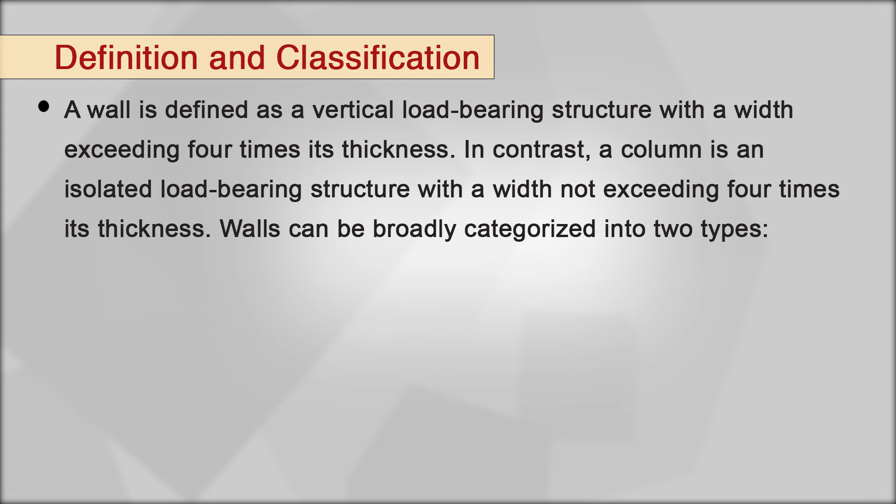A wall is defined as a vertical load bearing structure with a width exceeding 4 times its thickness, in contrast to a column, an isolated load bearing structure with a width not exceeding 4 times its thickness. So the walls can be broadly classified into two types.

Number 1 is load bearing wall, number 2 the non load bearing wall. Under load bearing walls, these are constructed to support the additional loads coming from the roof and other elements along with their own weight.

In contrast, the non load bearing walls support only their own weight and typically function as partition walls. In framed structures, the external non load bearing walls are often referred to as panel walls. These categories can be further subdivided into external or enclosing walls and internal or partition walls.

The load bearing walls. The load bearing walls are integral structural components which are designed to support the weight of a building, including the floors and roofs, in addition to their own weight. These walls transfer the load to the foundation, ensuring the stability and integrity of the structure.

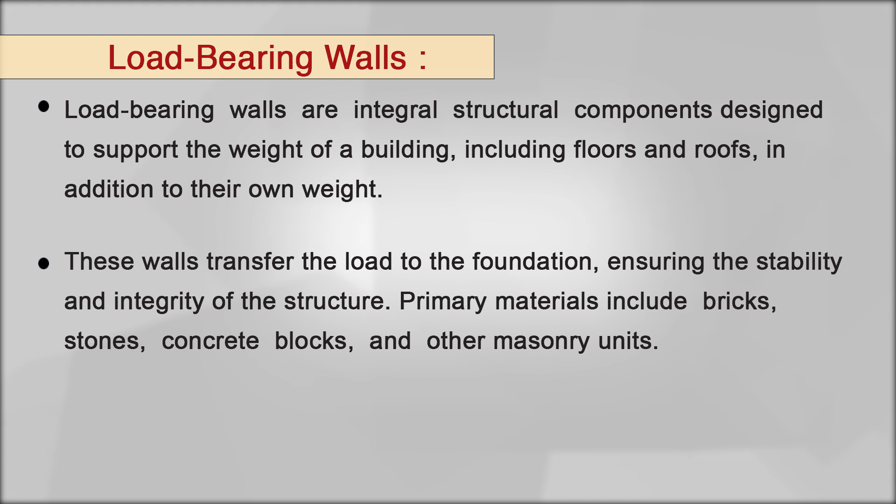Primary materials include bricks, stones, concrete blocks and other masonry units. The types of load bearing walls: number 1, solid masonry wall, cavity walls, faced walls and veneered walls.

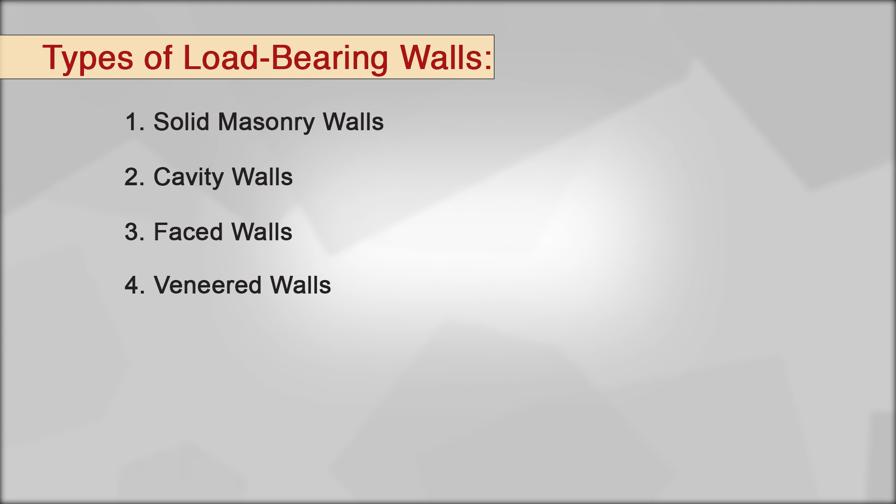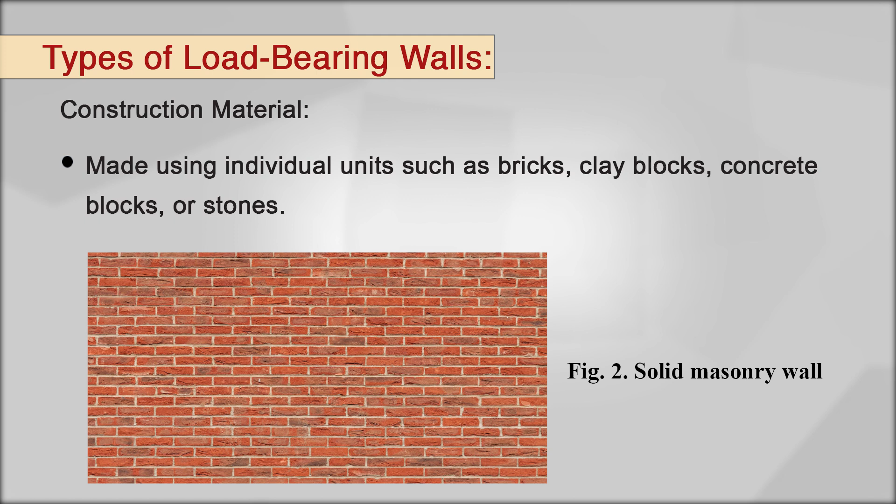The types of load bearing walls. Number 1, the solid masonry wall. It is constructed using individual units such as bricks, clay blocks, concrete blocks or stones that are typically laid in horizontal courses with mortar. The construction materials: it is made using individual units such as bricks, clay blocks, concrete blocks or stone. Their assembly: these units are typically laid in horizontal courses.

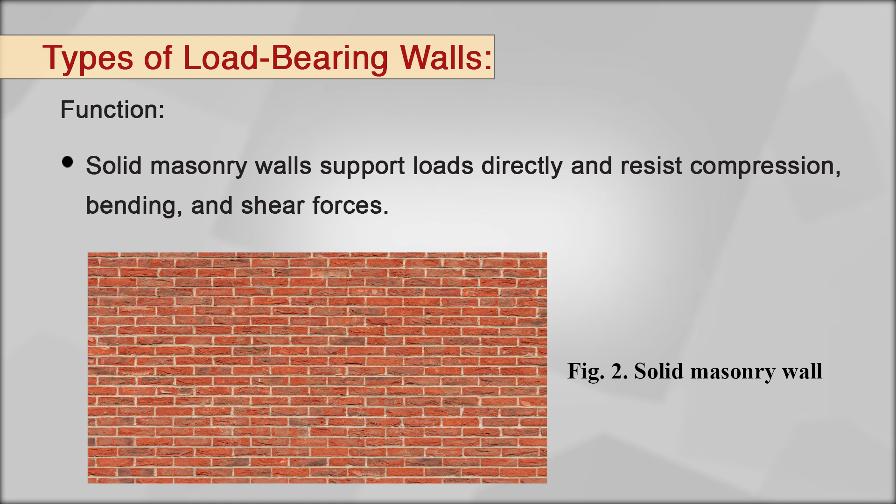Next is the bonding. These units are held together using mortar, which binds them and provides structural stability. Next is the function. The solid masonry walls support loads directly and resist compression, bending and shear forces.

Second type is the cavity walls. These cavity walls comprise two leaves separated by a cavity and are tied together with metal ties or bonding units. They are often filled with some insulation and waterproofing material.

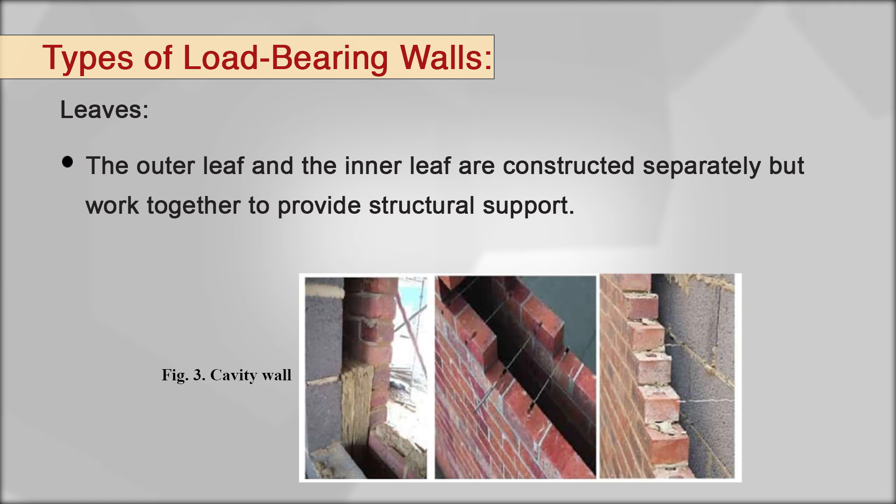The structure of the cavity wall: they are composed of two separate layers, also called leaves of masonry, with a gap or cavity in between them. The leaves are the outer leaf and inner leaf. These are constructed separately but work together to provide structural support.

Next is the bonding. To bond, metal ties or bonding units are used to connect the two leaves, ensuring structural integrity. Next is the insulation. The cavity in between is often filled with insulating materials in order to enhance the thermal performance and also waterproofing elements.

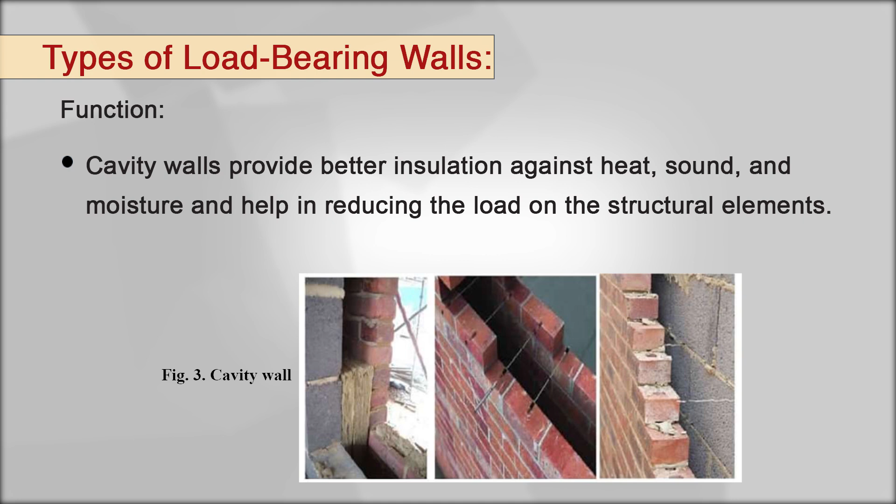The functions of the cavity wall: they provide better insulation against heat, sound and moisture, and also help in reducing the load on the structural elements.

The faced walls feature different materials for facing and backing. It is bonded to act together under load. So far as construction is concerned, it features different materials for facing and backing.

For facing, the exterior layer is typically made of a decorative or protective material like stone, brick or tiles. The backing, which is the internal layer, is usually constructed with materials that provide structural support. Next, bonding: the facing and backing are bonded together to work in union under load.

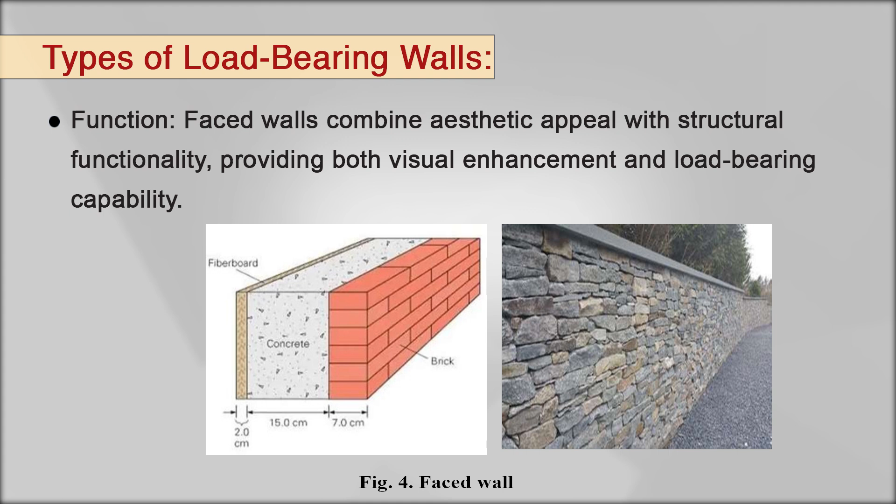Functions: the faced wall combines aesthetic appeal with structural functionality, providing both visual enhancement as well as load bearing capability. The next type is the veneered walls.

Veneered walls have a facing attached to the backing without a common bond to act together under the load. As far as construction is concerned, the facing material is attached to the backing without a common bond that unifies them. The external veneer is often made of high quality or decorative materials like marble, granite or bricks. Backing materials are typically different, mostly less decorative, maybe concrete or masonry.

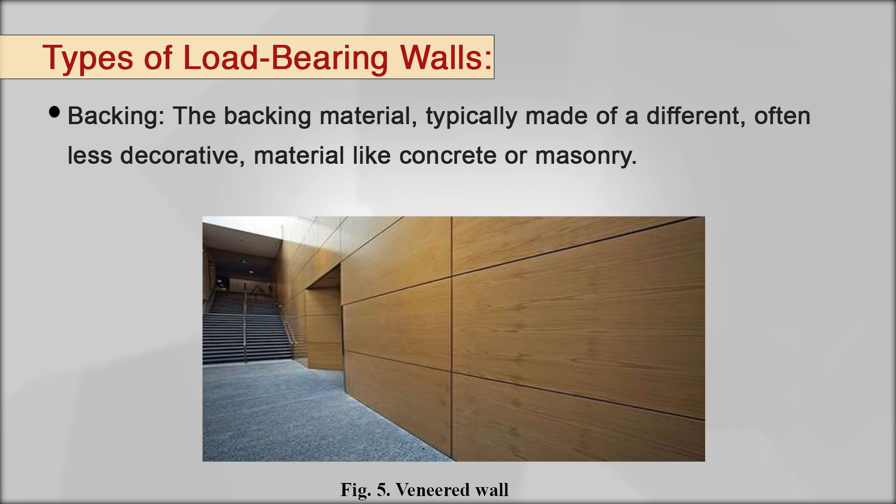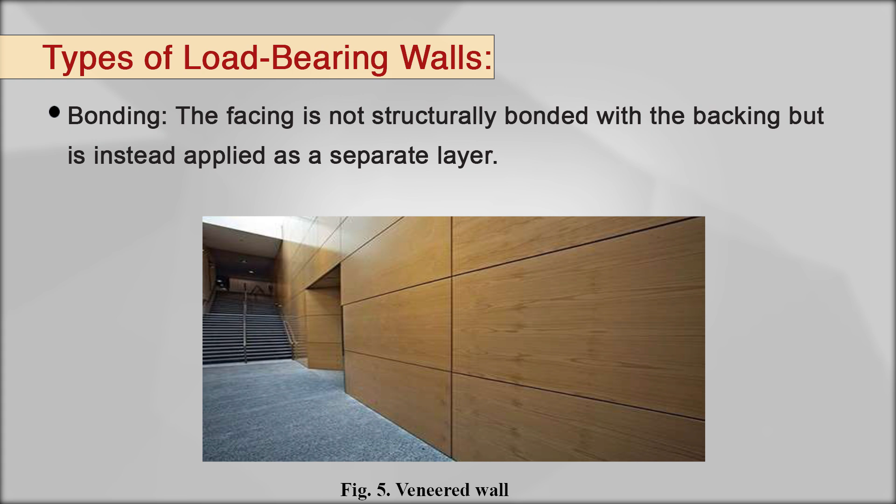So far as bonding is concerned, facing is not structurally bonded with the backing, but is instead applied as a separate layer. As for function, veneered walls provide an attractive appearance while relying on the backing for structural support, though the facing does not contribute to the load bearing capacity.

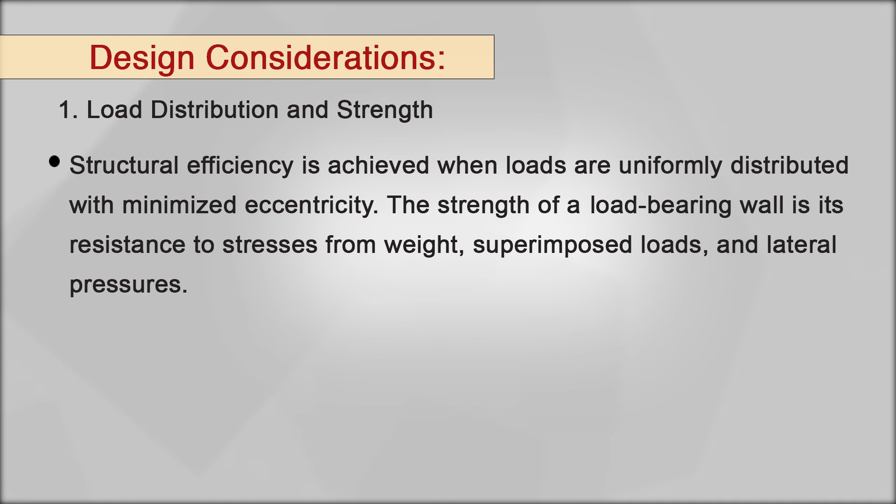Now the design considerations. First is load distribution and strength. Structural efficiency is achieved when loads are uniformly distributed with minimum eccentricity. The strength of a load bearing wall is its resistance to stresses that arise from the weight, superimposed loads and lateral pressure.

Next point is uniformity and eccentricity. Openings in walls should be designed to ensure uniform loading. Lintels and bed blocks provided under the beams must have generous bearings, and sections of the load bearing members should vary with loadings.

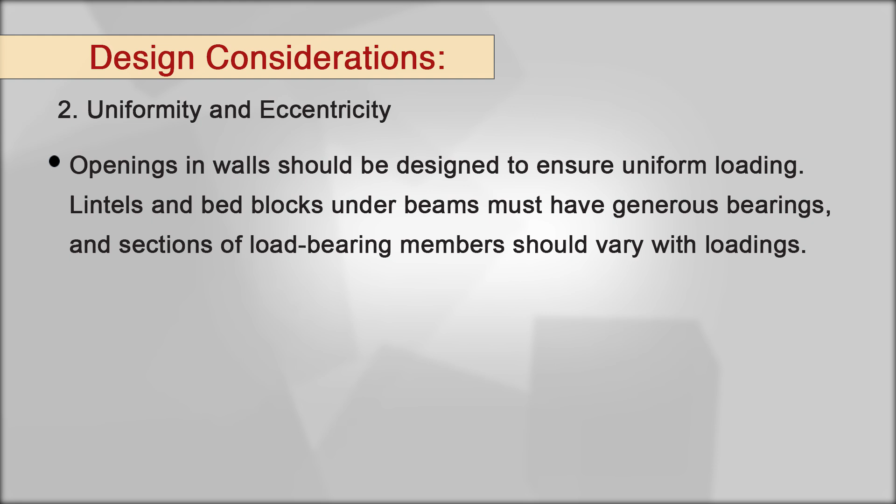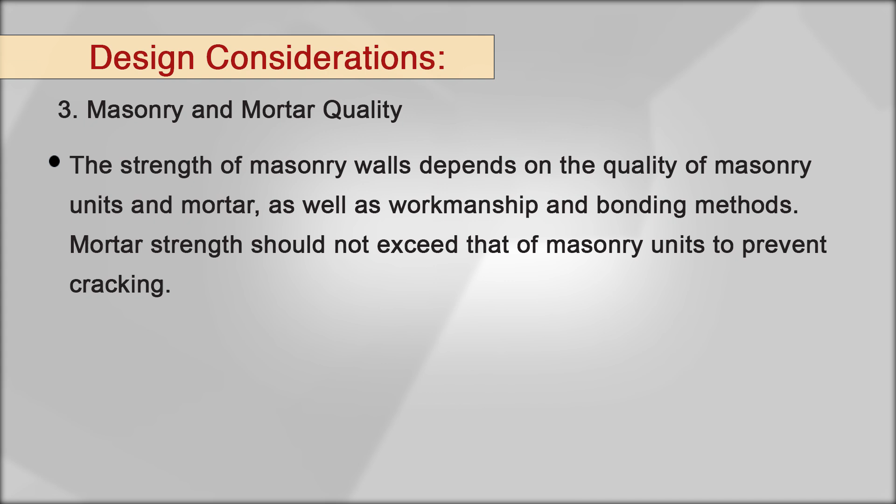Masonry and mortar quality: the strength of a masonry wall depends on the quality of masonry units and mortar, as well as the workmanship and bonding methods. Mortar strength should not exceed that of the masonry unit, so as to prevent cracking.

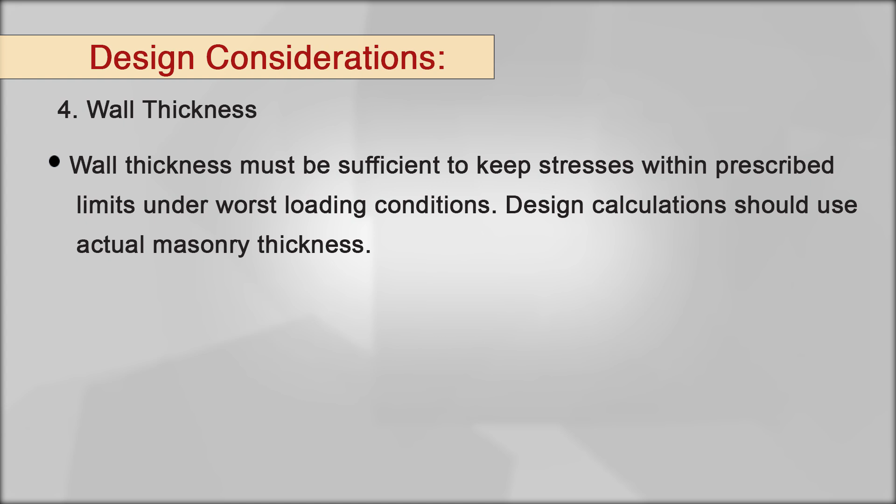Wall thickness: the wall thickness must be sufficient to keep the stresses within prescribed limits under the worst conditions and combinations of loading. The design calculations should use the actual masonry thickness.

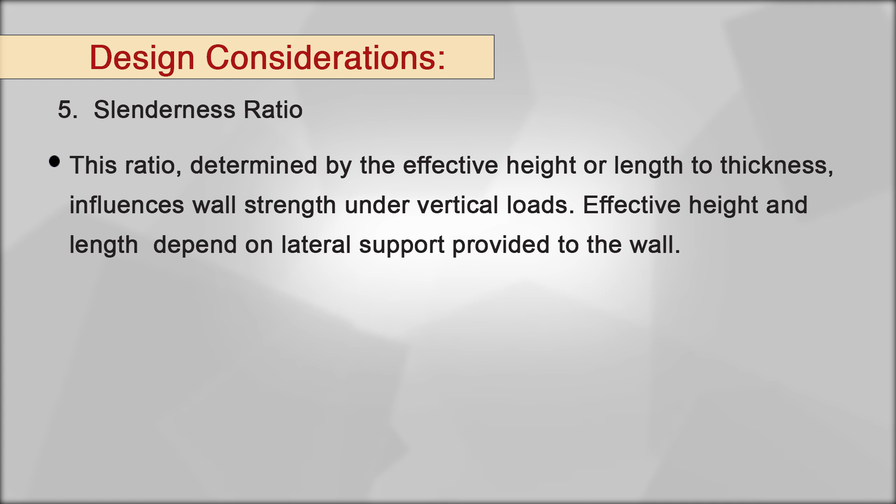Next is the slenderness ratio, which by definition is determined by the effective height or length to the thickness. This influences the wall strength under vertical loads. The effective height and length depend on the lateral support provided to the wall.

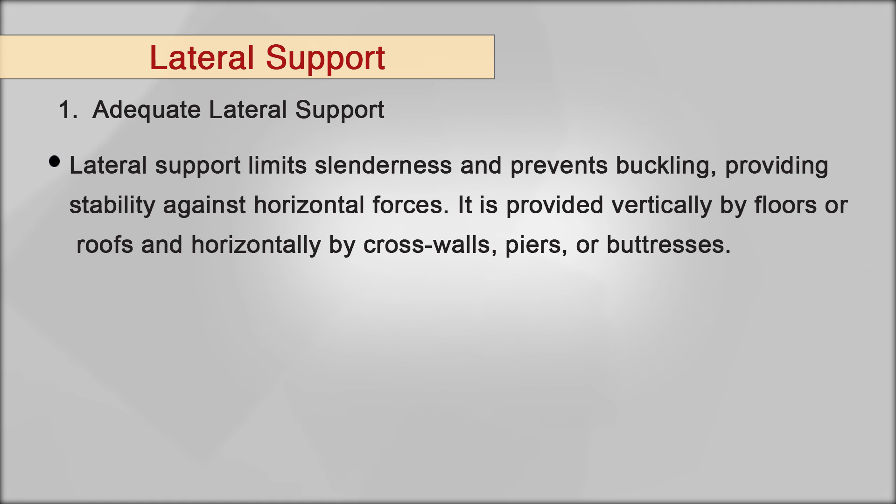Lateral support: adequate lateral support limits the slenderness and prevents buckling, providing stability against horizontal forces. It is provided vertically by floors or the roof, and horizontally by cross walls, piers or buttresses. The load bearing capacity of a wall basically depends on the spacing and effectiveness of the lateral supports.

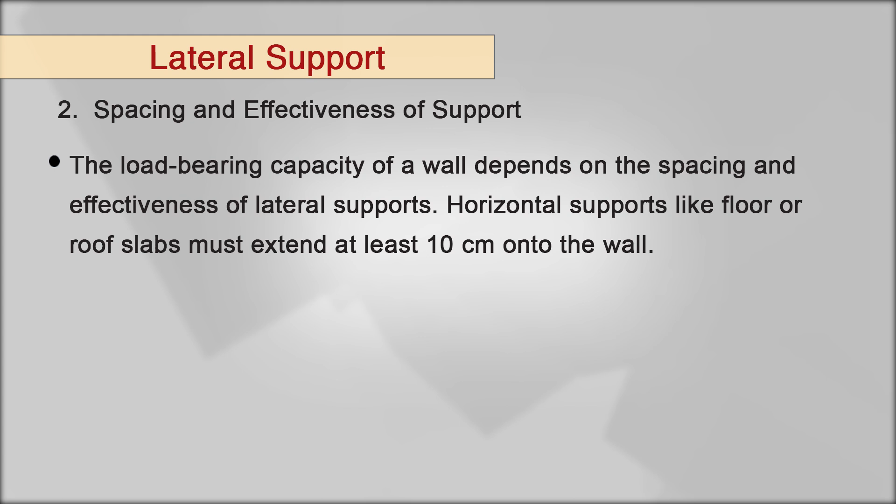Horizontal supports like floor or roof slab must extend at least 10 centimeters onto the wall. The National Building Code of India, in short NBC, specifies that when concrete slabs do not bear on a wall as required,

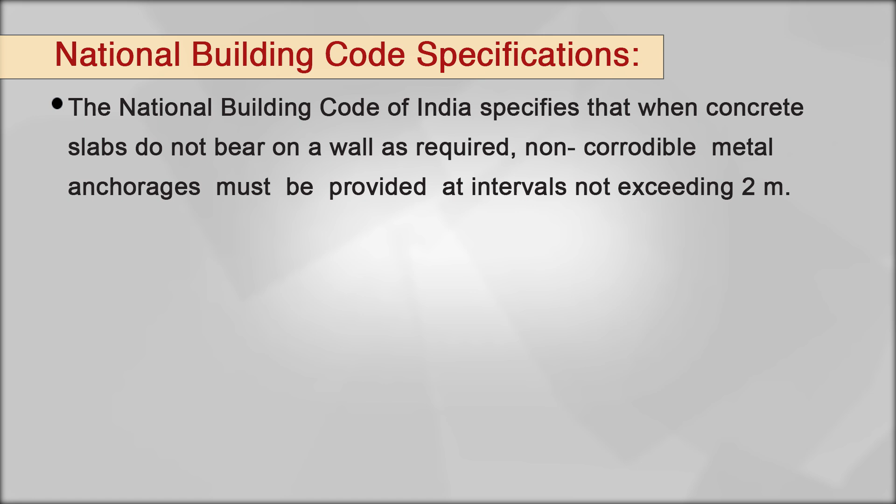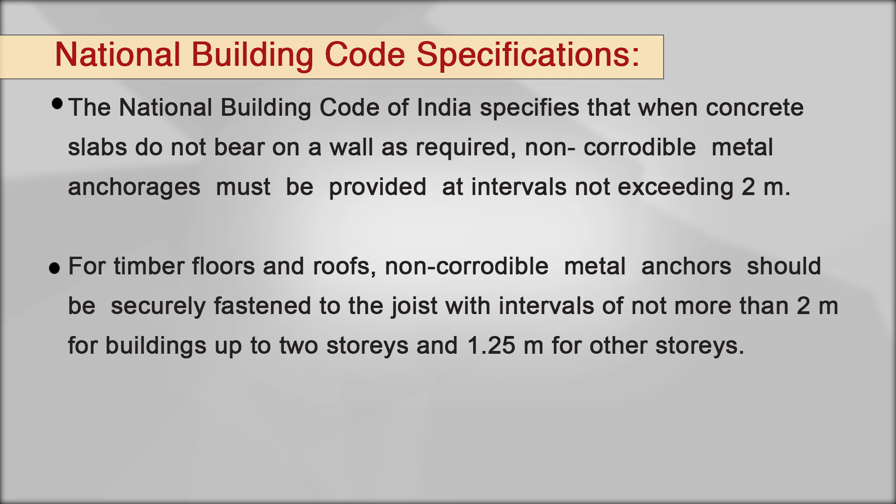non-corrodible metal anchorages must be provided at intervals not exceeding 2 meters. For timber floors and roofs, non-corrodible metal anchors should be securely fastened to the joists at intervals not more than 2 meters for buildings up to 2 stories, reduced further to 1.25 meters for other stories.

Cavity walls are a type of wall construction consisting of two parallel walls, also called leaves, with a gap or cavity between them. These walls are common in buildings for their superior thermal insulation, sound insulation and protection against moisture ingress.

There are a lot of advantages of using cavity walls. Number one is thermal insulation: the cavity acts as a barrier to heat transfer, making the building more energy efficient. So in all buildings where energy efficiency is a prime consideration, cavity walls should be thought of.

Number two is the barrier to heat transfer. The cavity within the wall acts as an insulating barrier, significantly reducing heat transfer between the interior and exterior of the building.

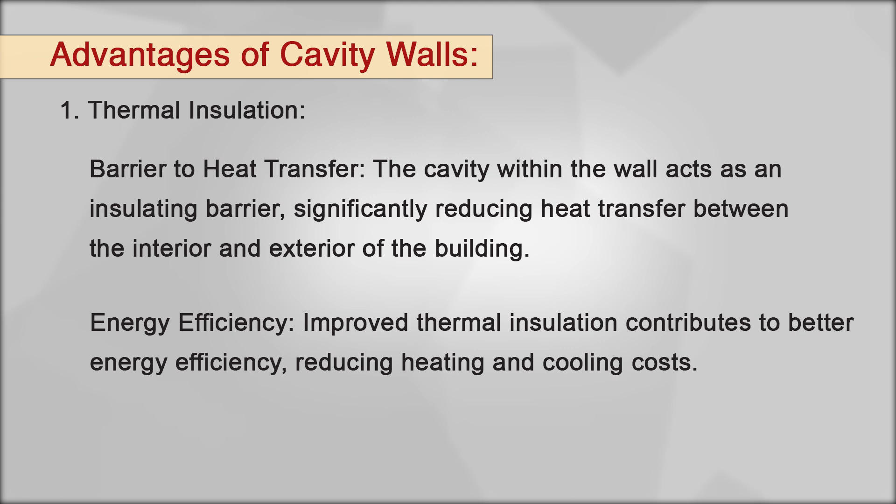Next is the energy efficiency. By using the cavity wall, improved thermal insulation contributes to better energy efficiency, reducing the heating and cooling cost.

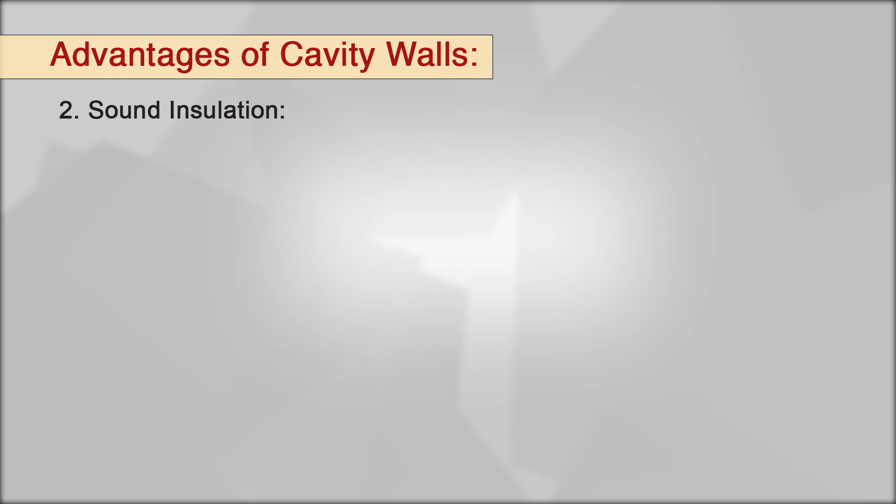Sound insulation. The cavity walls offer better sound insulation as the cavity disrupts the sound waves. This disruption occurs because of the air gap in the cavity, which dampens the sound waves, enhancing the wall's ability to reduce noise transmission between rooms or from outside.

Next is enhanced privacy. This cavity wall provides better soundproofing, which is beneficial in noisy environments or for maintaining privacy within the building.

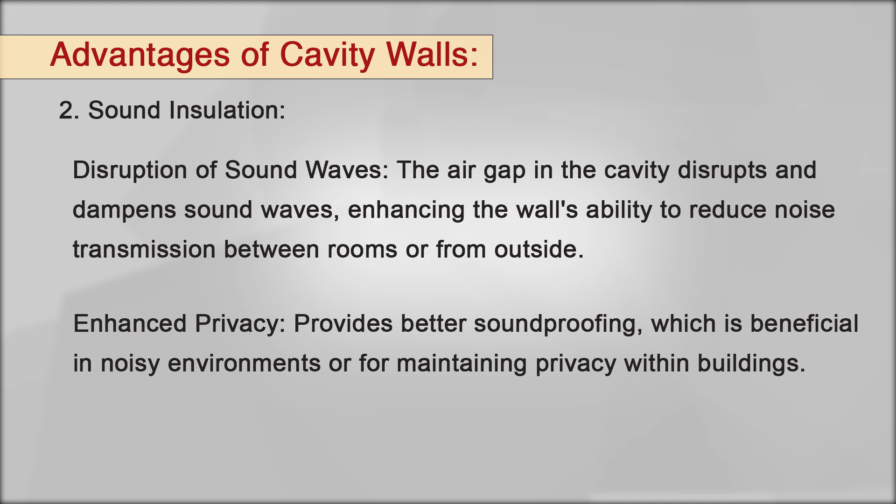Moisture protection. The cavity helps in preventing moisture from penetrating the inner wall leaf and protecting interior spaces from dampness. The cavity helps in preventing rainwater or other sources of moisture from reaching the inner wall leaf, thus protecting interior spaces from dampness and potential damage.

Next discussed is the durability. The cavity walls help in maintaining the longevity of buildings by mitigating issues related to moisture ingress.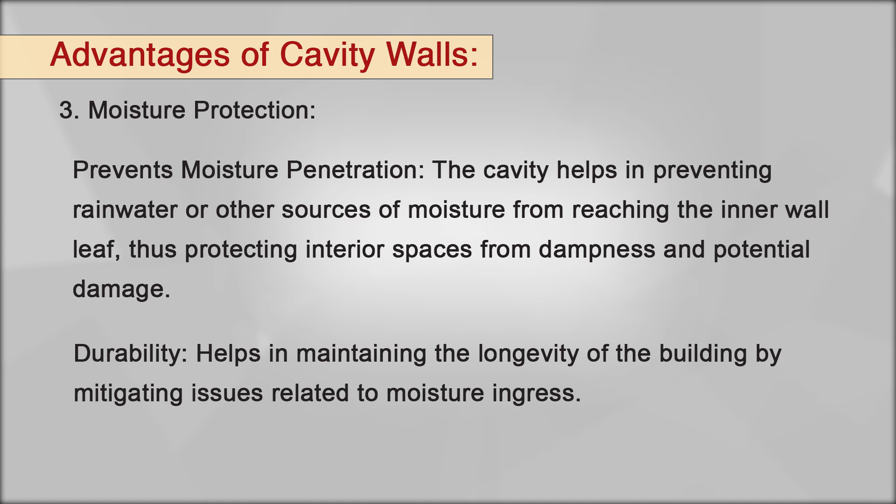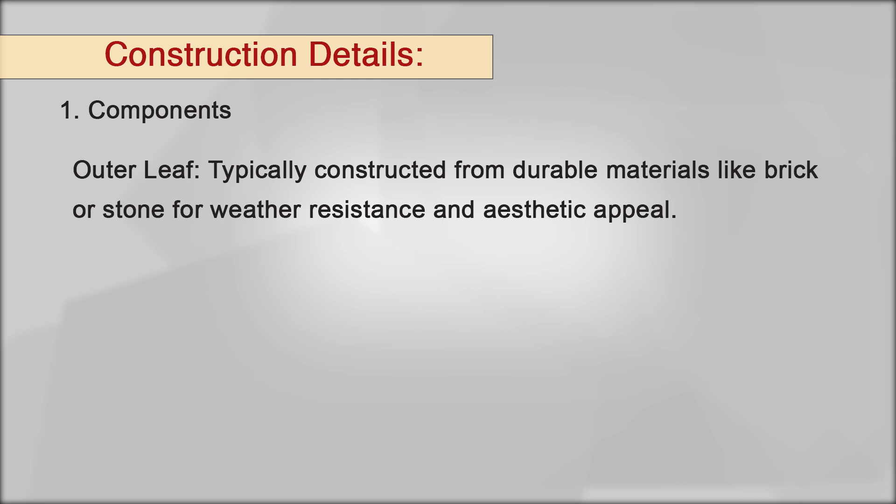The construction details. First is the components. Outer leaf, typically constructed from durable materials like bricks or stones for weather resistance and aesthetic appeal. The inner leaf is usually made of blocks or bricks, providing structural support and thermal insulation.

Next is the cavity. Generally the cavity is 50 to 100 mm wide, and the space between the two leaves may be filled with insulation materials to enhance thermal performance.

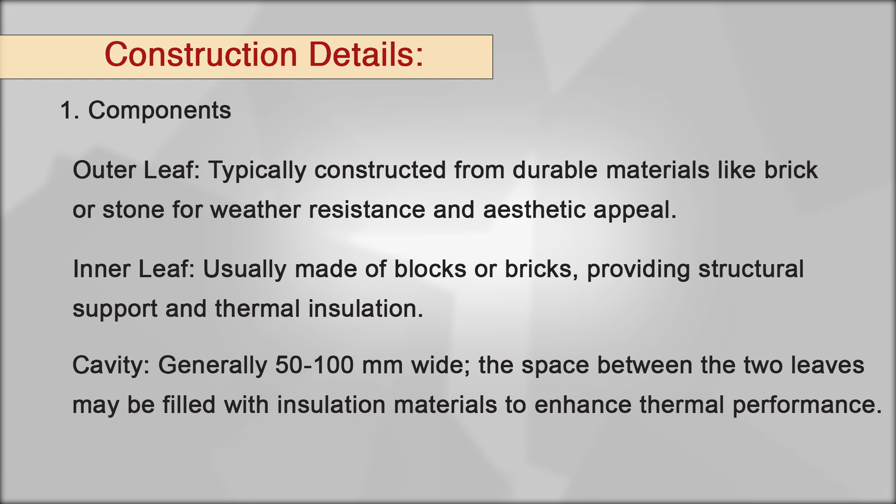The ties and anchors. Metal ties or bonding units are used to connect the two leaves at regular intervals, ensuring they act together structurally while maintaining the cavity gap. The materials used are metal ties, placed at regular intervals to connect the outer and inner leaves.

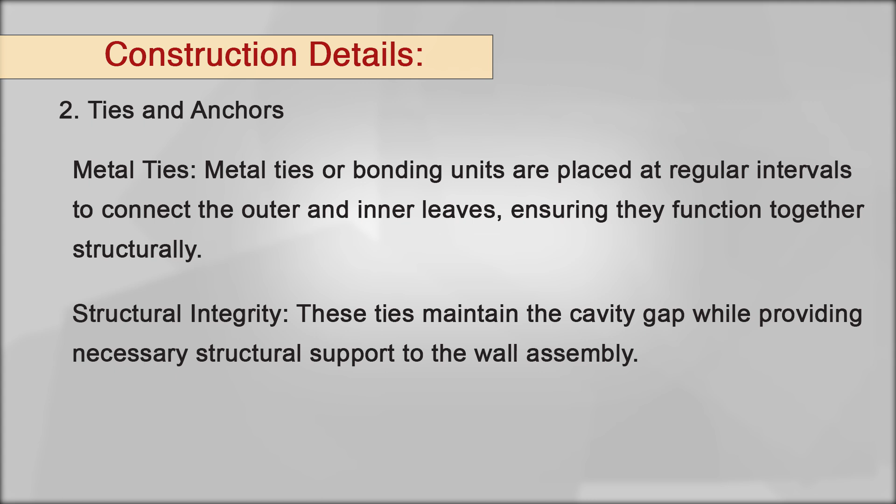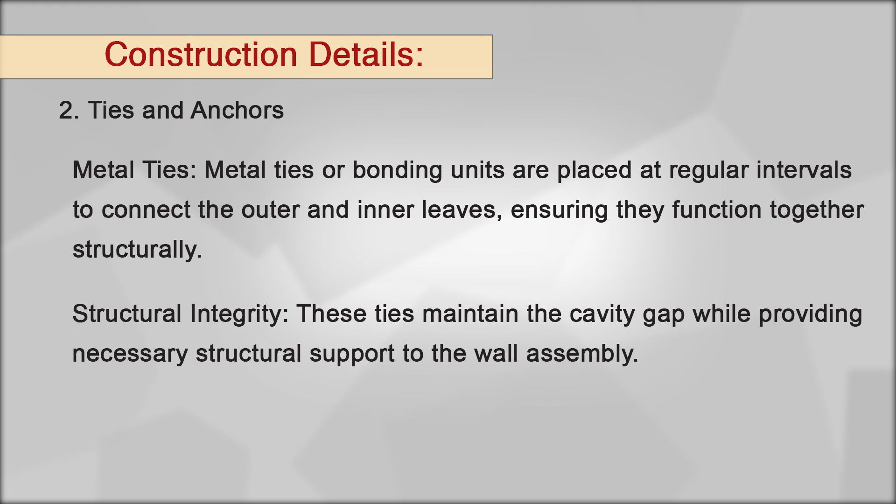Next is structural integrity. These ties maintain the cavity gap while providing necessary structural support to the wall assembly.

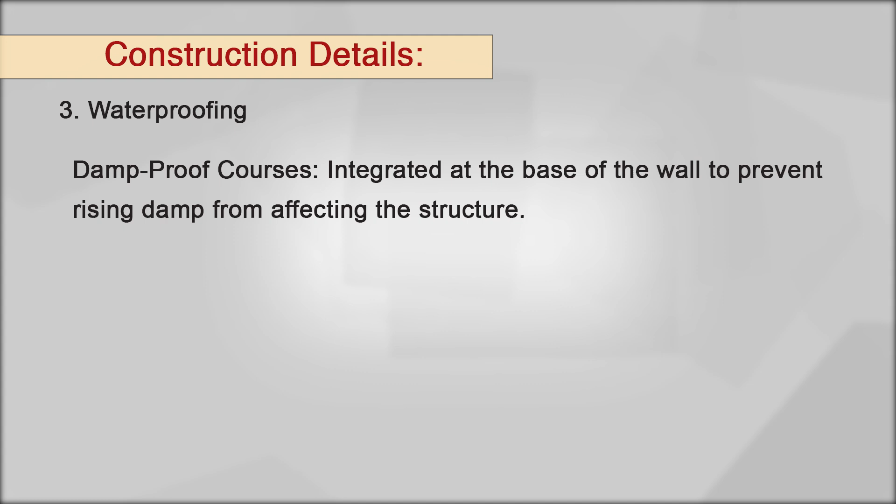Waterproofing. Cavity walls often incorporate damp proof courses and cavity trays to direct any moisture that enters the cavity out of the wall structure. Damp proof courses are integrated at the base of the wall to prevent rising dampness from affecting the structure.

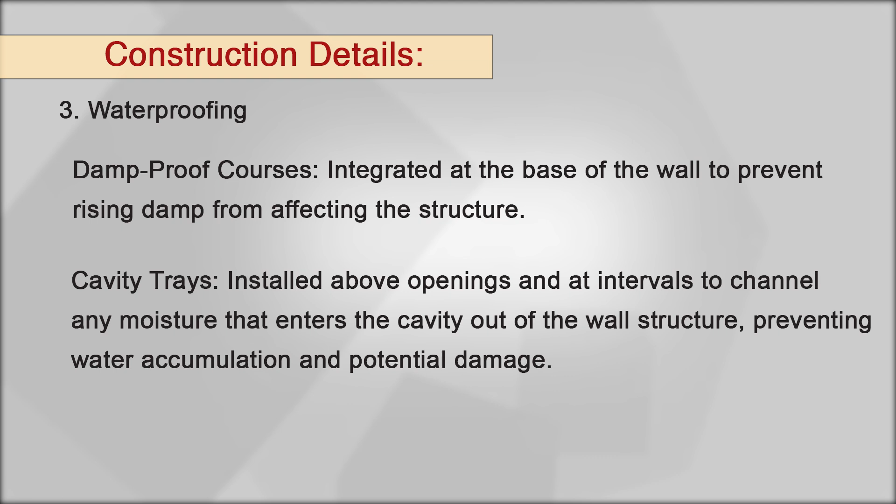The cavity trays are installed above the openings and at intervals to channel any moisture that enters the cavity out of the wall structure, preventing water accumulation and possible damage.

Insulation. There are different types of insulation; we will look at them one by one. Number 1, mineral wool. Mineral wools provide excellent thermal and sound insulation, and they are resistant to both fire and moisture.

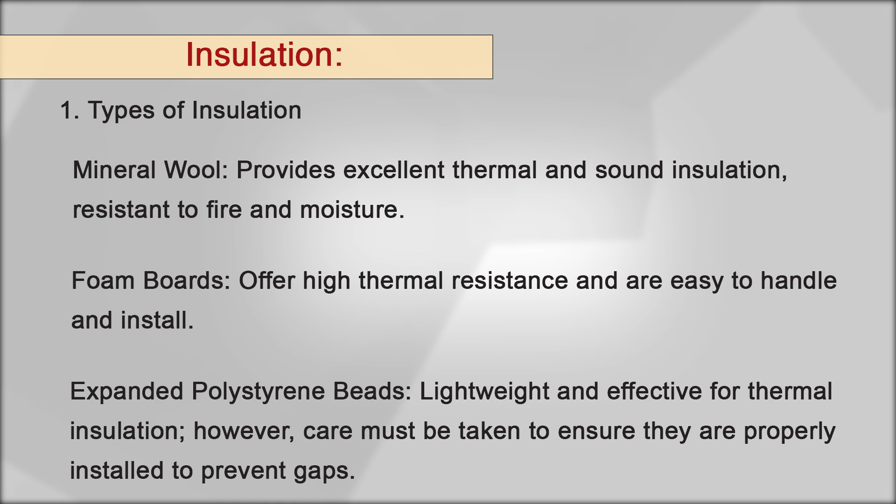Next material is foam boards, which offer high thermal resistance and are easy to handle and install. The expanded polystyrene beads are lightweight and effective for thermal insulation; however, care must be taken to ensure they are properly installed to prevent gaps.

Installation. It is very important to have number 1, gap free installation. The insulation should be installed without gaps to prevent thermal bridging, where heat bypasses the insulation and reduces the overall efficiency.

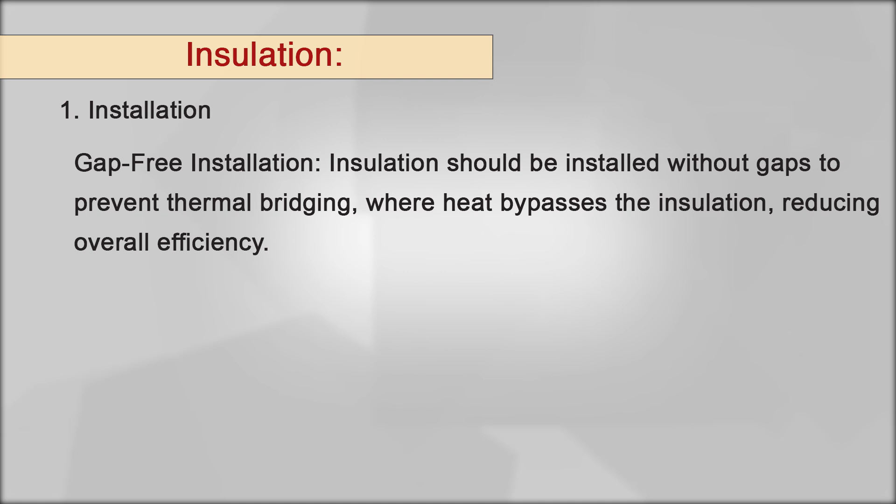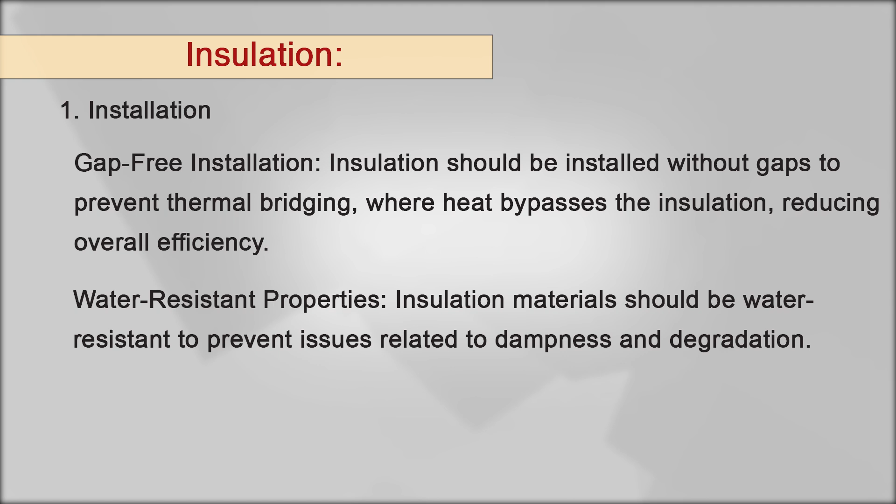Next is the water resistant properties. The insulation materials should be water resistant in order to prevent issues related to dampness and degradation. Very important is the maintenance.

Under this, inspection: regular inspections are necessary to ensure the cavity remains free from obstructions and that ties are in good condition. So how to do it?

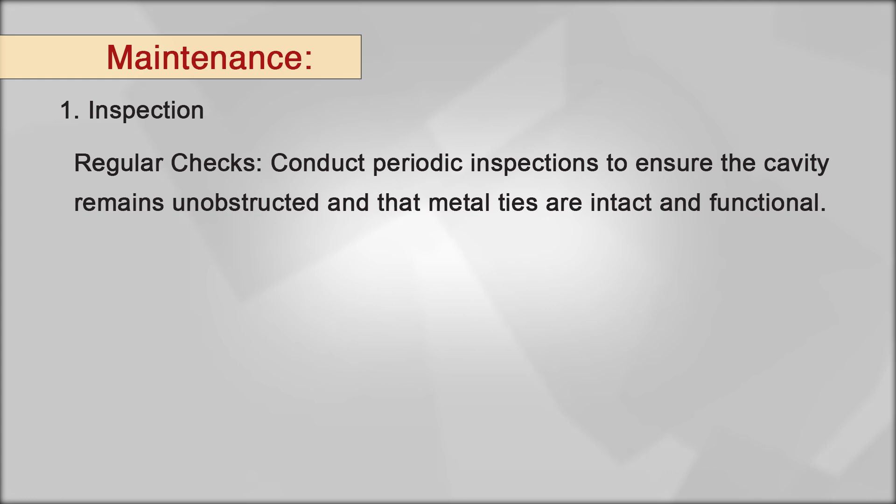Number 1 is regular checks. It is necessary to conduct periodic inspections to ensure that the cavity remains unobstructed and that metal ties are intact and functional. Second method is to identify issues early.

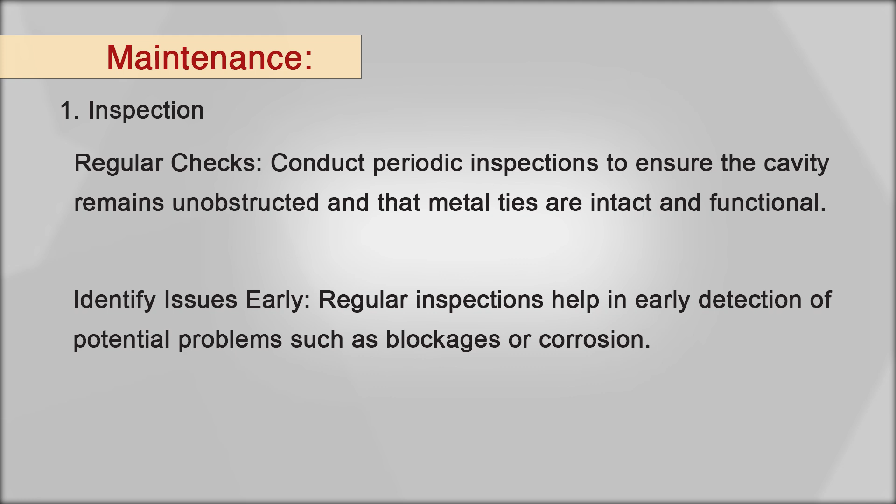Regular inspection helps in early detection of potential problems such as blockages or corrosion. If anything occurs, the next step is repair or regular maintenance.

So, repairs: number 1 is to address the damage promptly. In case of any damage that has occurred, maybe to the ties, leaves, or insulation, it should be repaired promptly to maintain the wall's structural integrity and thermal performance.

Maintain insulation integrity. This ensures that the repairs do not compromise the insulation's effectiveness or the wall's overall performance.

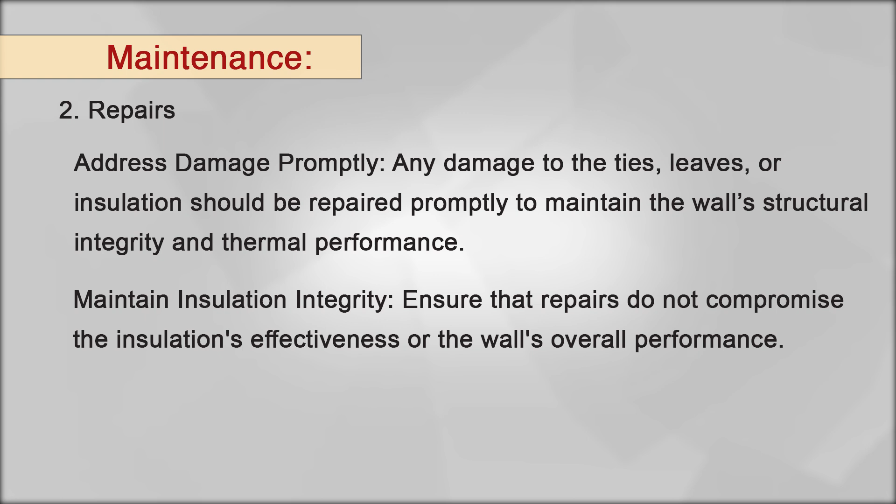Next is the partition walls. As far as the partition walls are concerned, we have already discussed that they are non-load bearing walls. They are constructed so as to divide the spaces within a building into separate rooms or areas. They are designed to support their own weight only, and in some cases some small amount of loads such as fixtures, etc., may be likely to be borne by them.

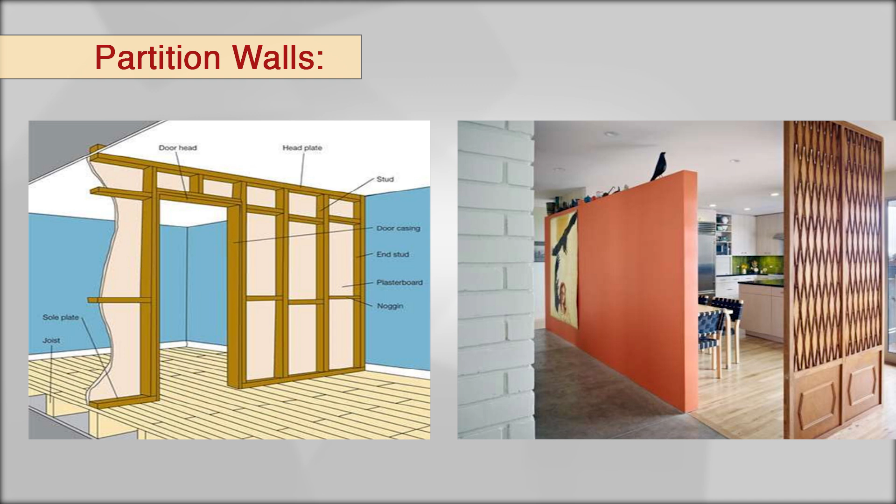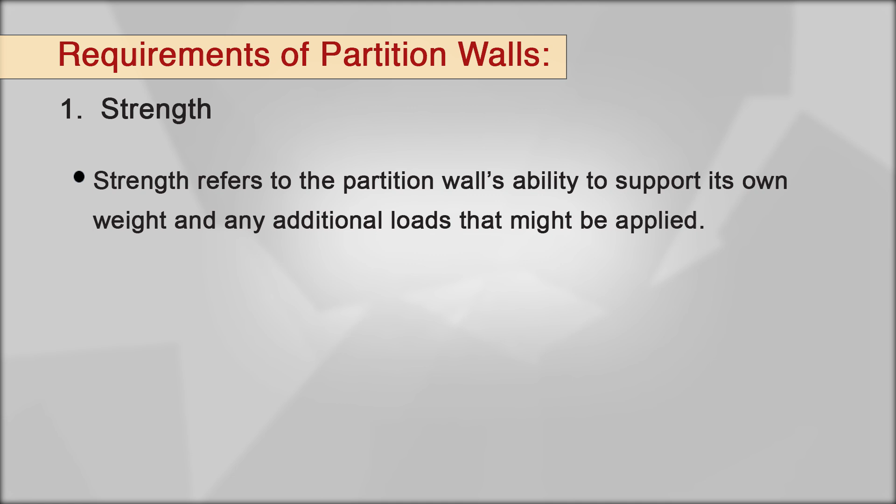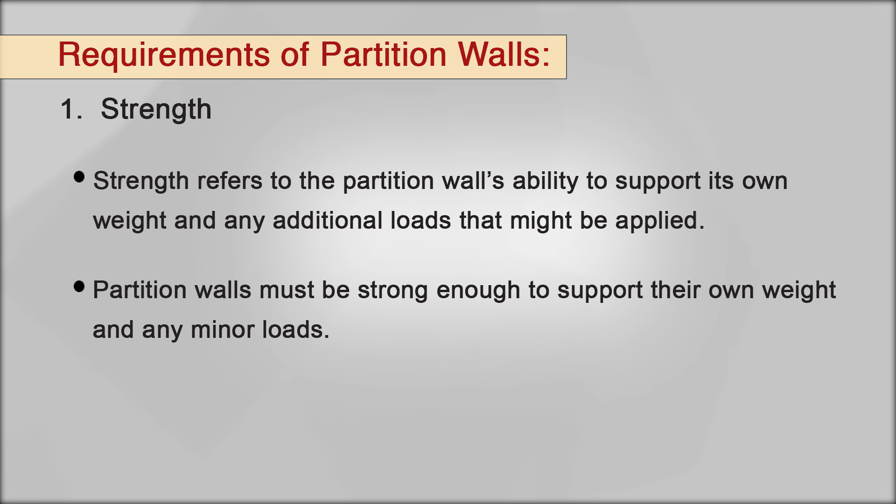The requirements of partition walls are, number 1, strength. The strength of the partition wall refers to the ability to support its own weight and any additional load that might be applied, because these are non-load bearing walls, so no external wall loading will be there. The partition walls must be strong enough to support their own weight and any minor loads that may occur.

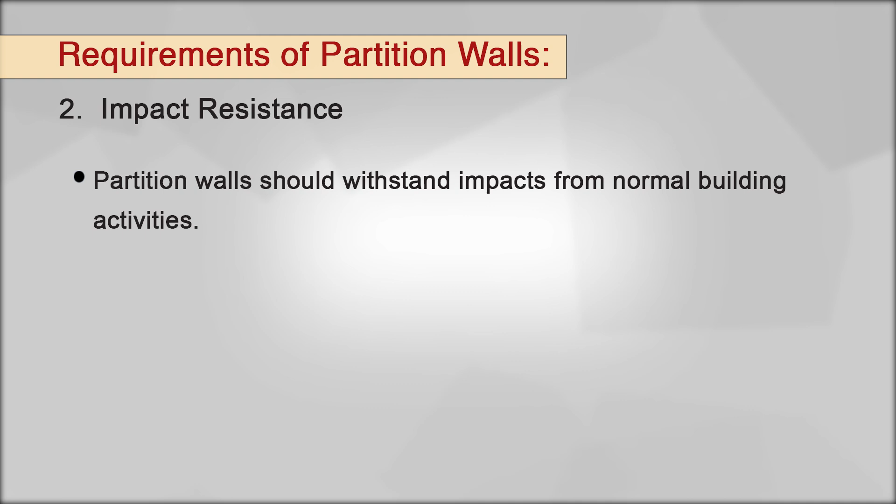Next is the impact resistance. The impact resistance is the partition wall's ability to withstand physical impacts like bumps or knocks that occur during normal building activities. The decorative surface support involves the wall's ability to hold and support various finishes like plaster, paint or tiles. The partition walls must support the finishes just discussed.

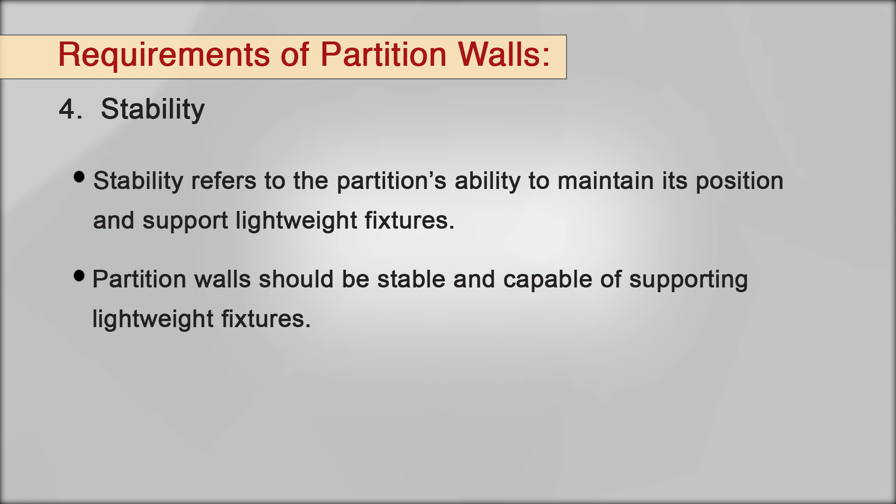The stability. By stability of the partition wall, it is referred to the partition's ability to maintain its position and support the lightweight fixtures. So the partition walls should be stable and should be capable of supporting lightweight fixtures.

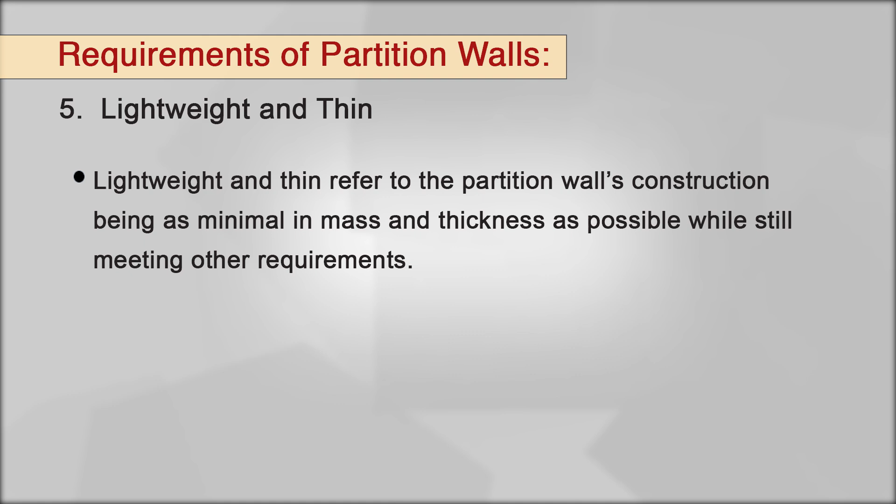Lightweight and thin refers to the partition wall's construction being as minimal in mass and thickness as possible while still meeting other requirements. So the partition walls should be as light and thin as possible to maximize the usable floor space and minimize the structural loading.

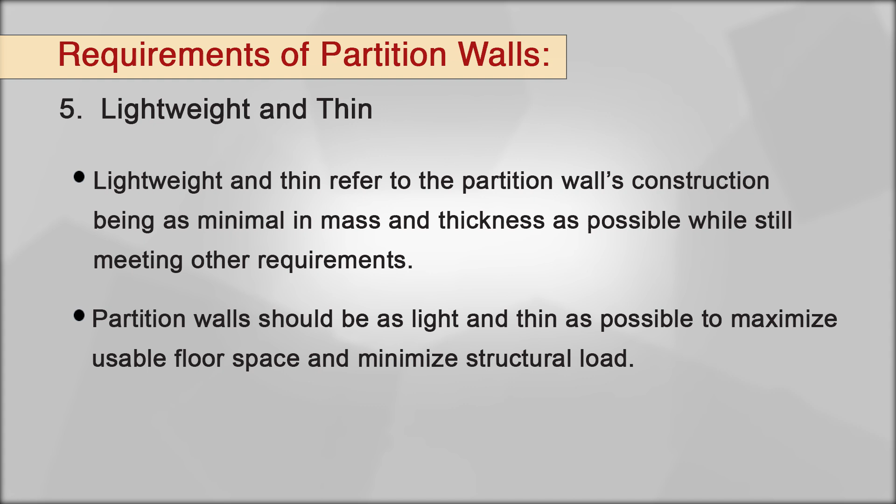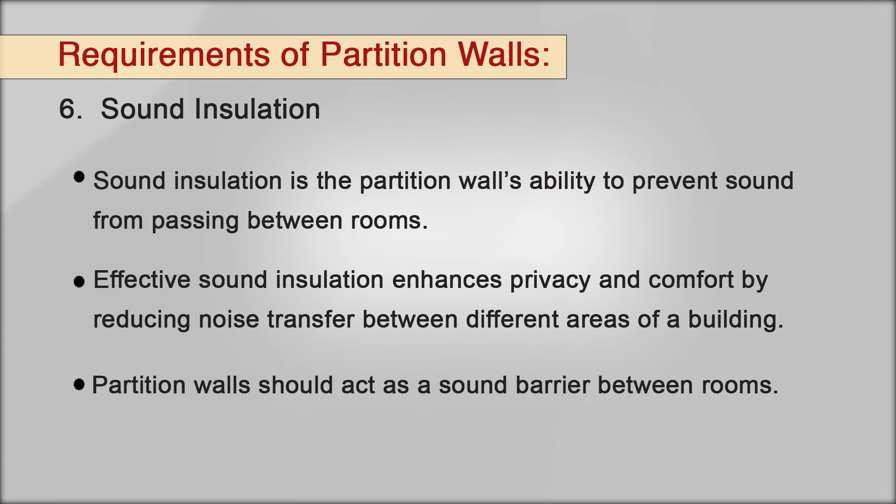Sound insulation is the partition wall's ability to prevent sound from passing between the rooms. Effective sound insulation enhances privacy and comfort by reducing the noise that transfers between different areas of a building. The partition walls should act as a sound barrier between different rooms.

Next is the fire resistance. Fire resistance is the partition wall's ability to resist the spread of fire and maintain structural integrity in case any fire occurs. So it is very much expected that partition walls must provide resistance to fire, and it becomes more prominent and significant especially in the case of multi-story buildings.

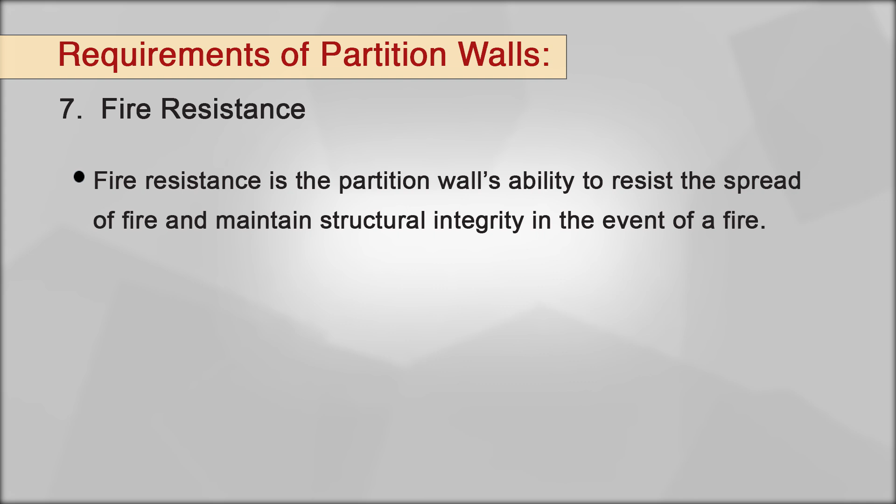The types of partition walls. Number one is the brick partitions. For brick partitions, number one is the cost effectiveness, generally more affordable as compared to other materials due to the widespread availability of bricks and mortar. So if the partition walls are made by bricks, it becomes very easy so far as the availability of the materials is concerned.

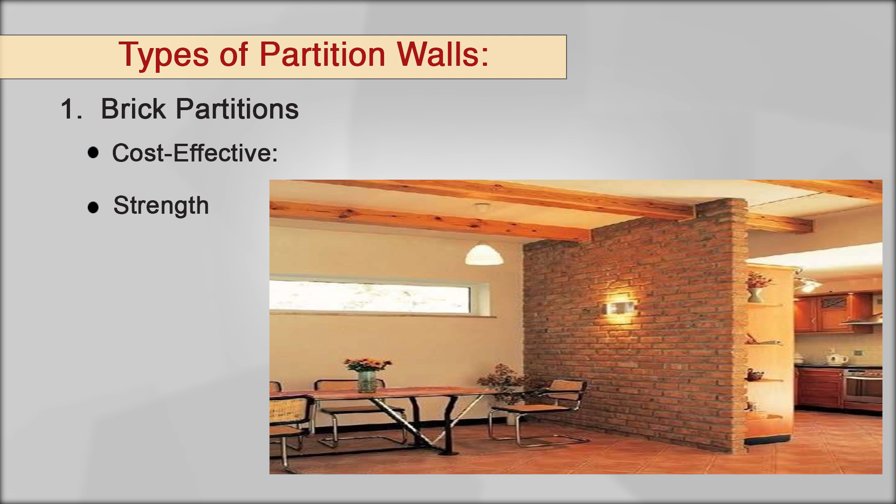Second is the strength. Brick partition walls mostly provide substantial structural integrity and durability. The types: plain brick partitions are made from standard bricks and mortar, suitable for general use where high strength is not needed.

Another one is the reinforced brick partitions. It incorporates reinforcements such as steel bars or mesh to enhance the strength and stability. It is used in load bearing situations or where additional support is required.

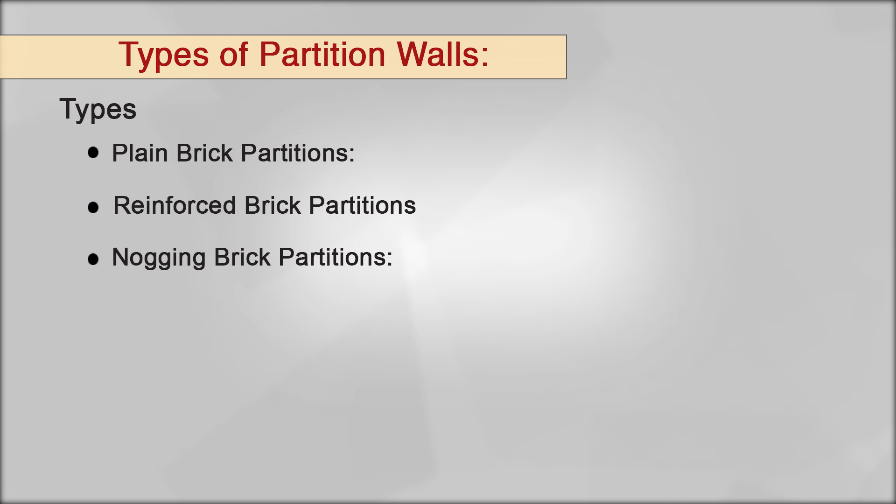Next is the nogging brick partitions. It features a framework, that is nogging of timber or metal, is filled with bricks, often used to combine the structural benefits of both materials. The clay brick partitions, materials type use solid clay blocks.

It is made from compacted clay, offering high compressive strength and good insulation properties. Next is the hollow clay blocks. It includes internal voids to reduce the weight and improve the insulation. It is often used in situations where thermal and acoustic insulation is important.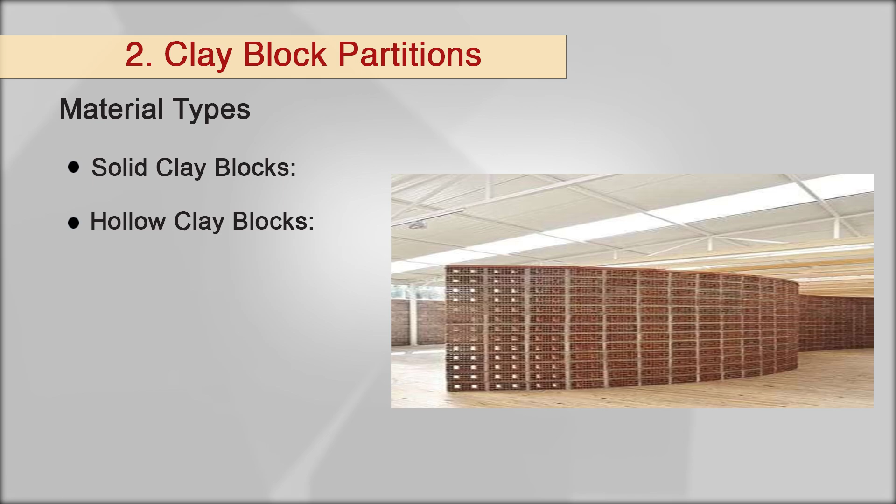Next is thermal insulation. Good thermal resistance helps to maintain consistent interior temperatures. The sound insulation: these blocks provide effective sound attenuation, making it suitable for spaces requiring privacy or noise control.

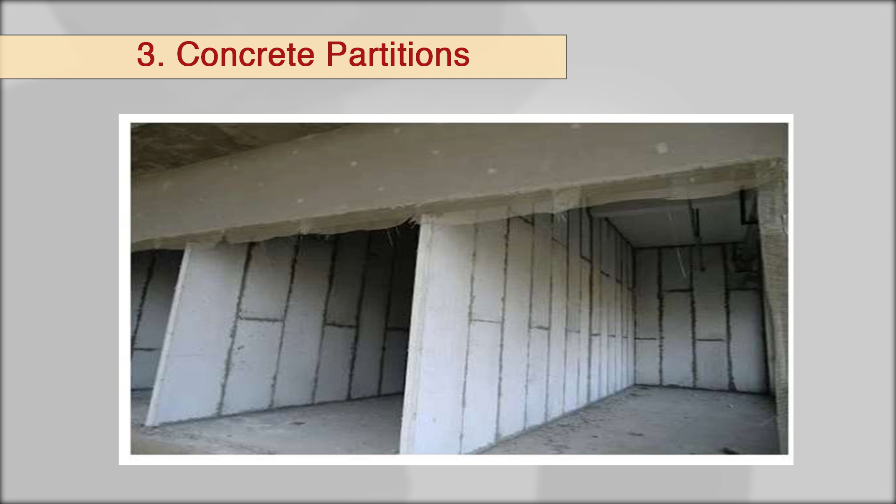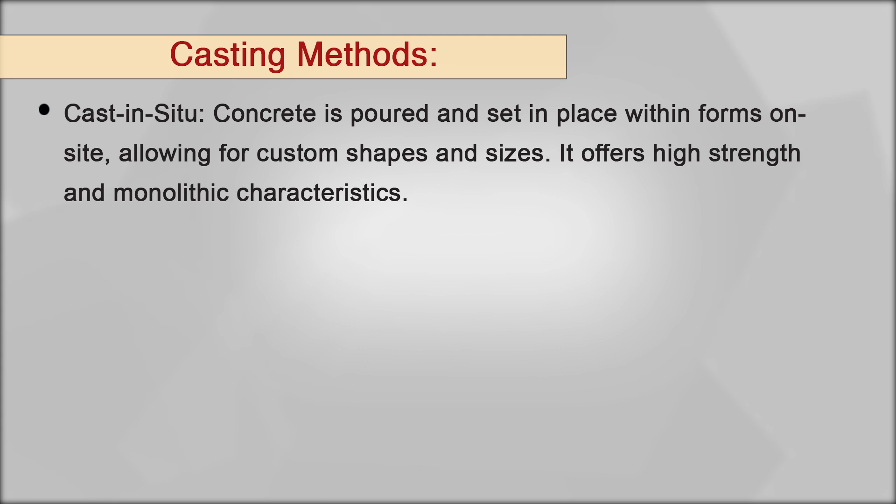The concrete partitions: casting methods, there can be two casting methods, one is cast in situ and the other is precast. As far as cast in situ is concerned, the concrete is poured and set in place within the forms on site, allowing for custom shapes and sizes. It offers high strength and monolithic characteristics.

The second type is precast. The concrete panels or blocks are manufactured off site and then transported and assembled at the construction location. This method speeds up construction and ensures consistent quality.

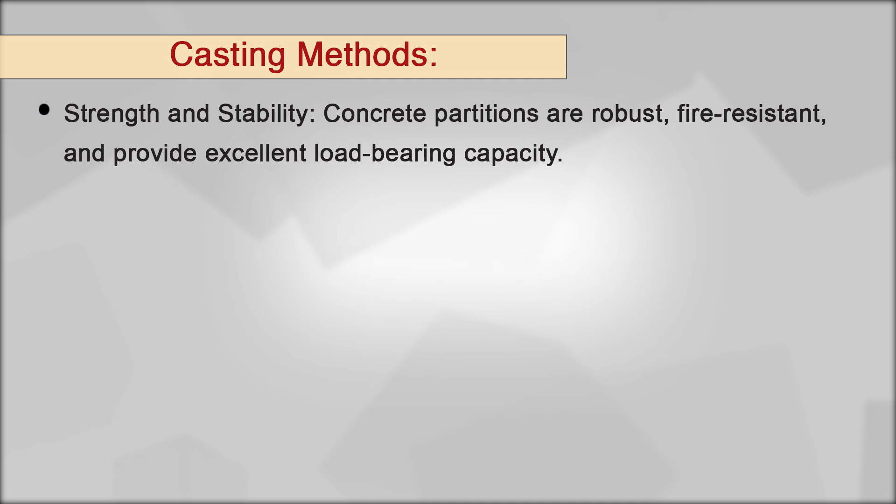The strength and stability of concrete partitions are definitely robust, fire resistant, and provide excellent load bearing capacity.

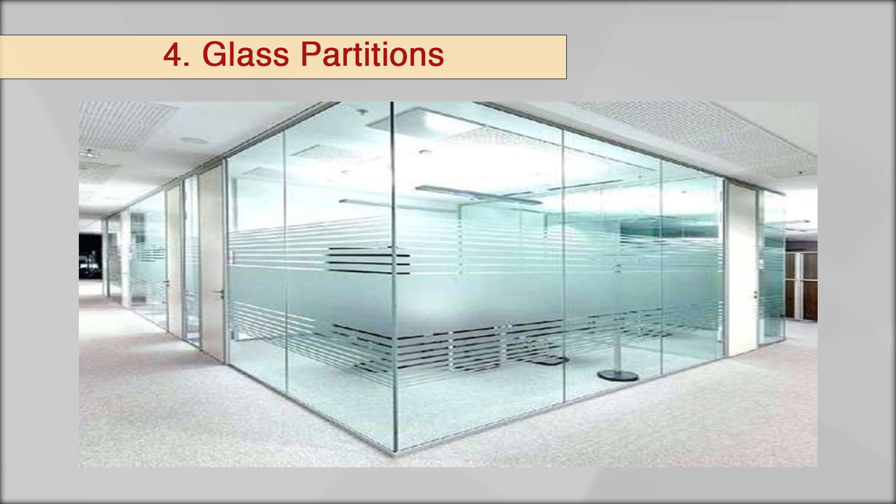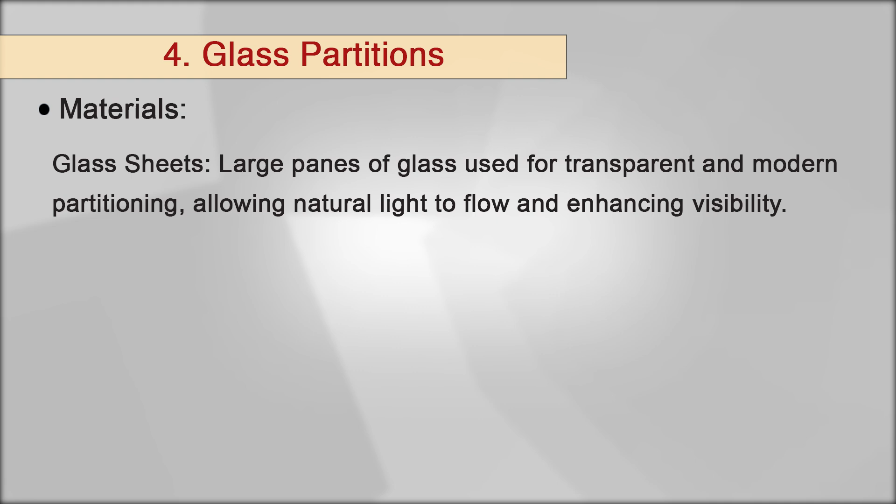Glass partitions. The materials used include glass sheets and glass blocks. As far as glass sheets are concerned, large panes of glass are used for transparent and modern partitioning, allowing natural light to flow and enhancing visibility.

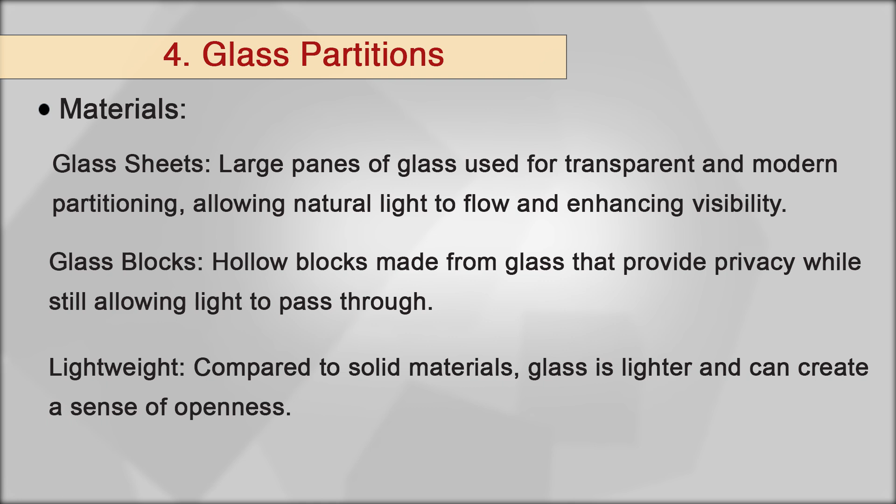Second is glass blocks, hollow blocks made from glass that provide privacy while still allowing light to pass through. As compared to solid materials like concrete or bricks, glass is lighter and can create a sense of openness. It also offers transparency, a contemporary look, and maintains visual connections between spaces while providing acoustic separation.

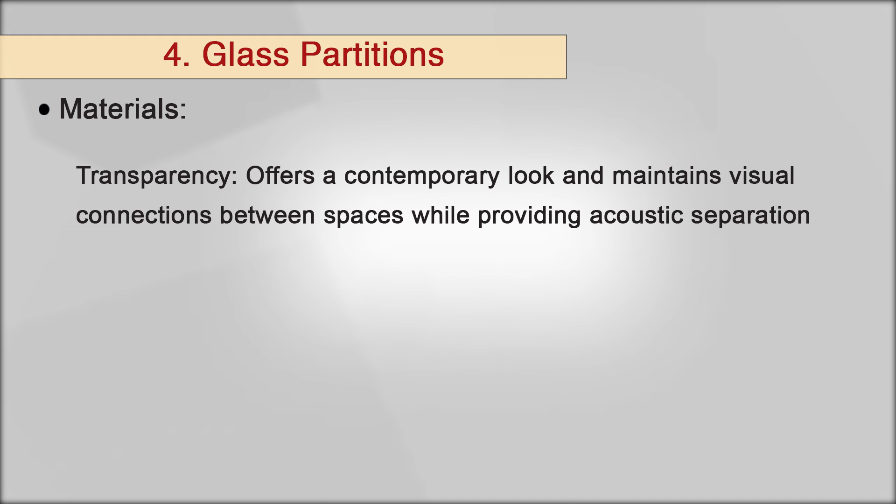Metal lath partitions, as far as construction is concerned, use metal lath and plaster. A framework of metal mesh or lath is used as a base for plaster application, providing support and adherence for the plaster.

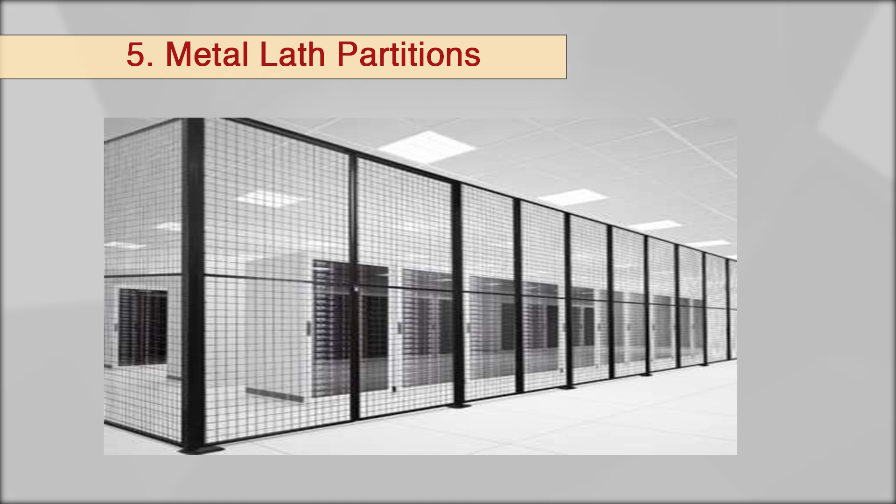The plaster is applied over the metal lath to create a finished surface, providing a smooth and durable finish. Metal lath partitions are strong and have good resistance to damage, making them suitable for high traffic areas. They also offer good fire resistance, contributing to safety in buildings.

Asbestos sheet or GI partitions: asbestos sheets are very economical and cost effective. However, they are less common today because of the serious health risks associated with inhalation of asbestos fibers, which can cause respiratory diseases.

GI sheets, also called galvanized iron sheets, are lightweight and easy to install. As far as durability is concerned, they provide good resistance to corrosion and weathering, making them suitable for various environmental conditions. They are an affordable option for partitioning, although less commonly used in modern construction due to aesthetics and insulation limitations.

Plaster slab partitions: the material is made from plaster, which can be a mixture of gypsum, lime, or cement. These plaster slabs are relatively light compared to concrete or brick partitions, making them easier to handle and install. As far as insulation is concerned, they provide good thermal insulation due to the nature of the plaster, which helps maintain consistent temperature within the building.

Ease of installation: it becomes very easy to install, often coming in pre-made panels that can be quickly mounted in place. As far as finish is concerned, they typically provide a smooth surface that can be painted or finished to match interiors. They are suitable for non-load bearing partitions and interior applications where a lightweight solution is beneficial.

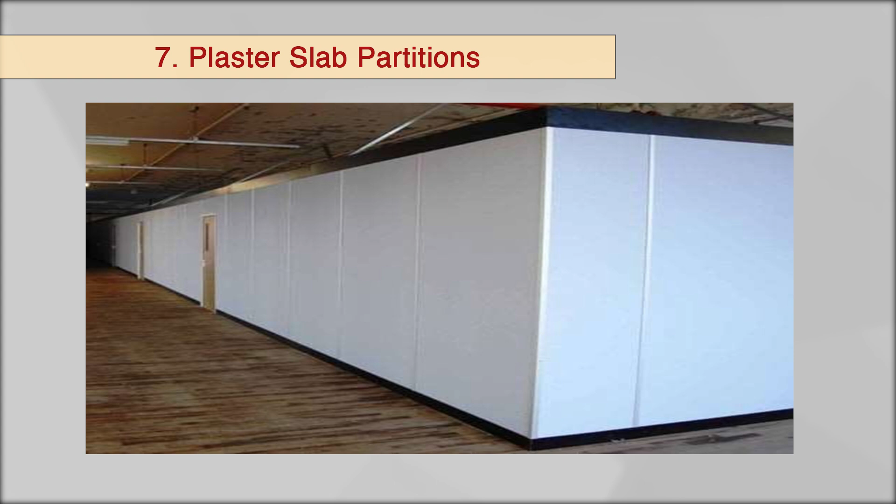Wood wool slab partitions use materials like wood fibers, cement, and sound insulation. These are made from a mixture of wood fibers bonded with cement or other binding materials. The cement acts as a binder to hold the wood fibers together, enhancing durability and strength. As far as insulation is concerned, they have excellent sound insulation properties due to the porous and fibrous nature of the material, making them ideal for acoustical separation.

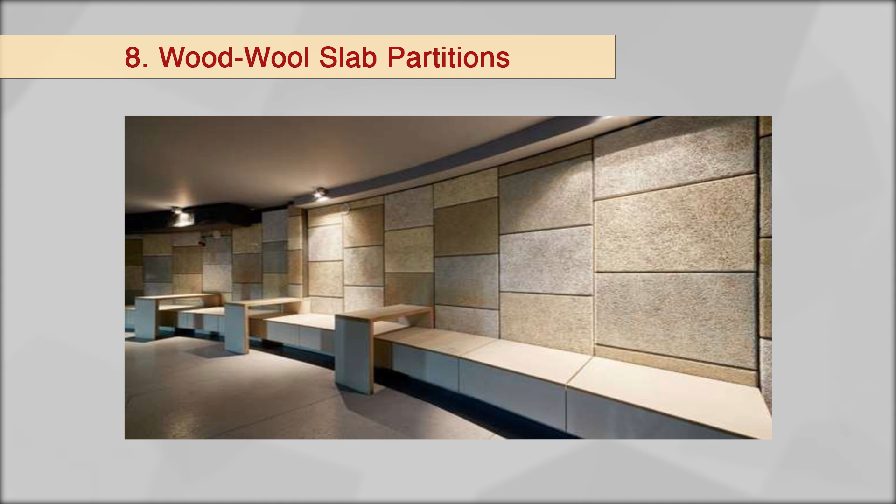Wood wool partitions are lightweight, lighter than traditional concrete slabs, and simple to handle and install. As far as thermal insulation is concerned, they have good thermal insulation, contributing to energy efficiency by reducing heat loss or gain.

Timber partitions use wooden framework or panels, incorporating various types of wood such as softwood or hardwood. They provide traditional aesthetics, a warm appearance that is pleasing and often used in historical or rustic designs. As far as cost is concerned, it can be more expensive due to the cost of high quality wood and labor.

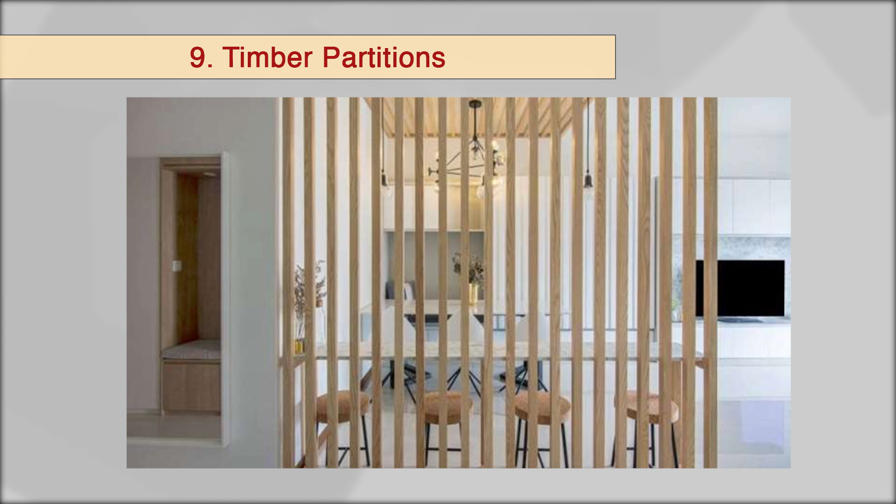As far as insulation is concerned, timber offers decent thermal and sound insulation, but may require additional materials to meet modern building standards. As for sustainability, wood is a renewable source, but sourcing practices need to be sustainable to minimize environmental impact.

So with this we come to an end of this session, in which we have studied about the different types of walls, their materials, and uses, and understanding these aspects is very essential for efficient and effective building construction.